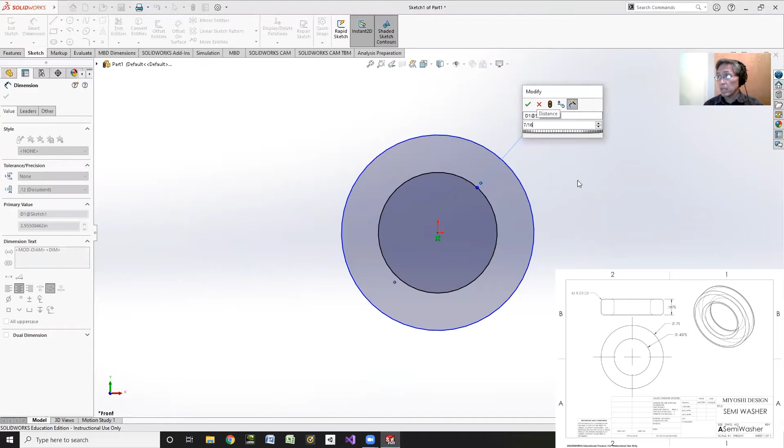Then we'll just smart dimension it. It's going to be the same as our axle, actually slightly bigger than the axle. So it's 7/16, and then we'll make the outer one 3/4.

Now we're just going to make extrude boss base. It doesn't matter if we extrude both ways or not. We're going to extrude it 3/16 of an inch, so I'll make sure this is highlighted and do 3/16.

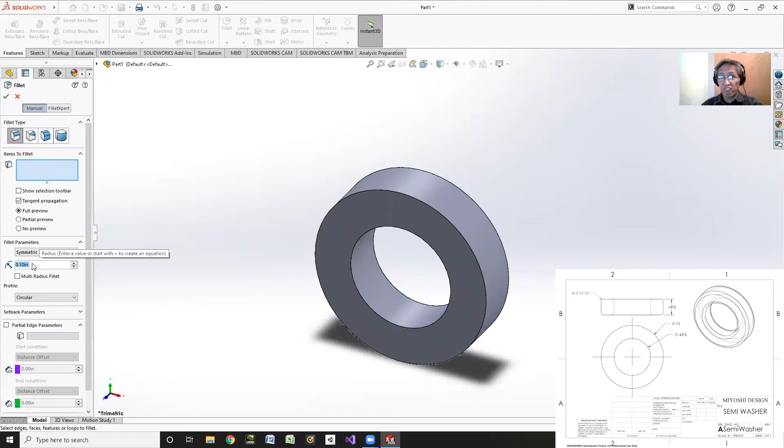There we have it. Now, since it's a little washer, maybe I should put tiny fillets there. So let's do fillets, small ones. We'll make them 32nd, grab the edge, and there we have it.

Little washer. Oh, let's do one more thing. I'll right click on fillet, go back to edit the feature, and we'll put little fillets on the inside too. There we go, little fillet.

So I'll save this up as little washer, I'll do semi washer. That looks really big, but it's not.

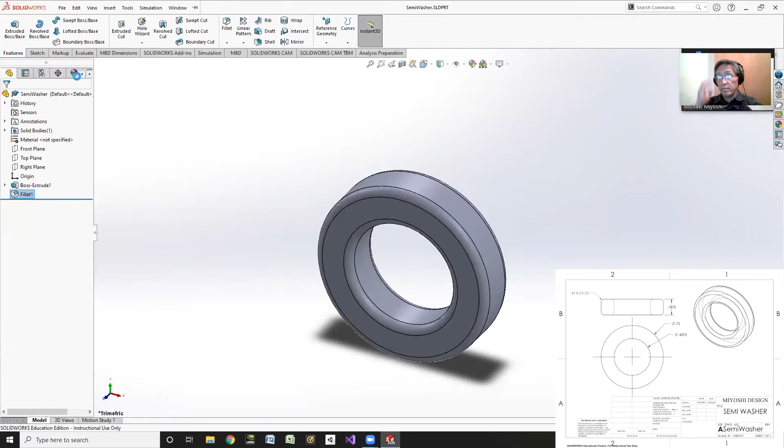So then we'll do a new part from drawing, from part, and select ANSI landscape.

Of course, I want to do drawing, model view next. And I want to do multiple views: top, front, and right. The trimetric's already selected, so I'll leave that there.

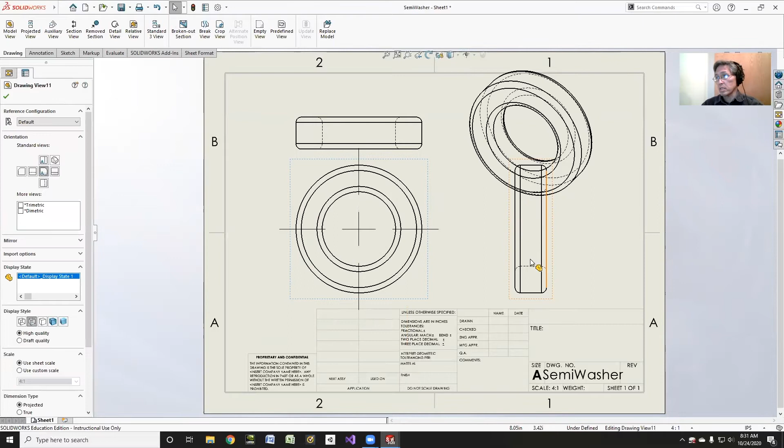I want to see the hidden lines, and notice I want to use sheet scale. It is 4:1, so it's quite a bit big. We might change that in a minute. We'll move this around a touch. If I don't need the right view, we'll see which views I want.

I do want to get rid of the tangent lines. Right click, select tangent edge, tangent remove. I got to do that on all my views, so right click, tangent edge, tangent remove, again on the other view. And I'm going to do that on the trimetric view too, right click, tangent edge removed.

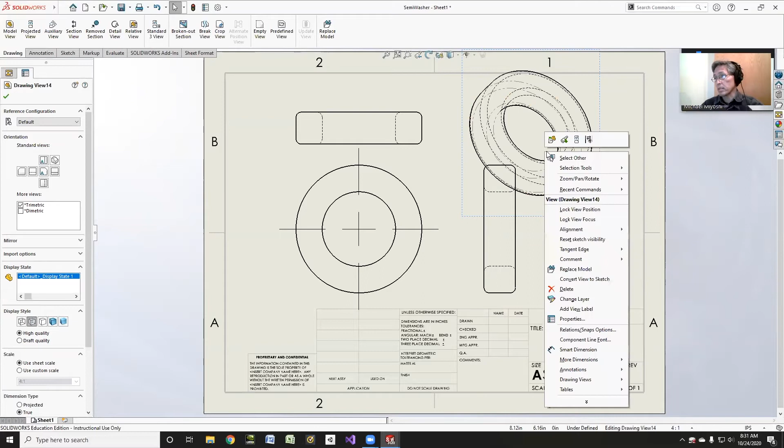No, maybe not, we'll put it back in. Right click, tangent edge visible. I don't know what this font is, let's try that, see what that is. Yeah, I don't like that as much. So we'll right click, tangent edge visible. Yeah, it's okay. All right, so move that down over there.

Now we will do annotation, model items, entire model, import items in all views, and hit the OK button. Move that down here.

Make sure it's enough decimal places. There we go, and move the diameter here. Looks good, pull this out just a touch. And my fillet dimension, I don't really like it there, so let's just get rid of that.

We'll just put another smart dimension, fillet it up here, or put the fillet up here. And we know that's going to need 4 decimal places. That's 5, I need 5.

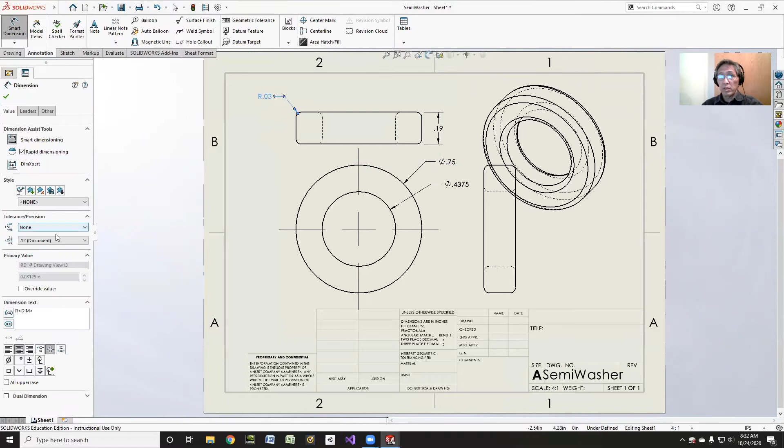So for the 32nd, I need 5 decimal places, and we'll put 4x there, 4x space. Okay, and I'll put it like that. Looks better. Then we'll make sure we give that enough decimal places as well.

Oops, I don't need 5. We'll just do 4, and that looks pretty good.

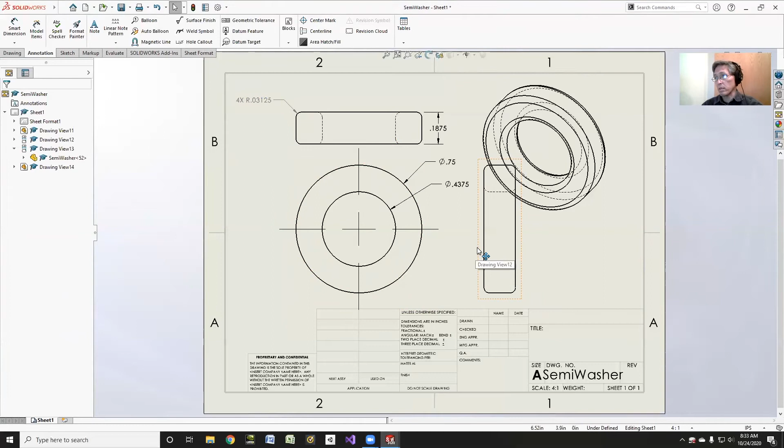I don't need this right view at all, so I'll delete it. Yep, sorry, oops, need to do that, get that back, I don't want to get rid of that. I want to be out of smart dimension, that was my mistake, I'll get rid of the view instead. Just hit the delete button, hit OK. And there we have it, our little washer.

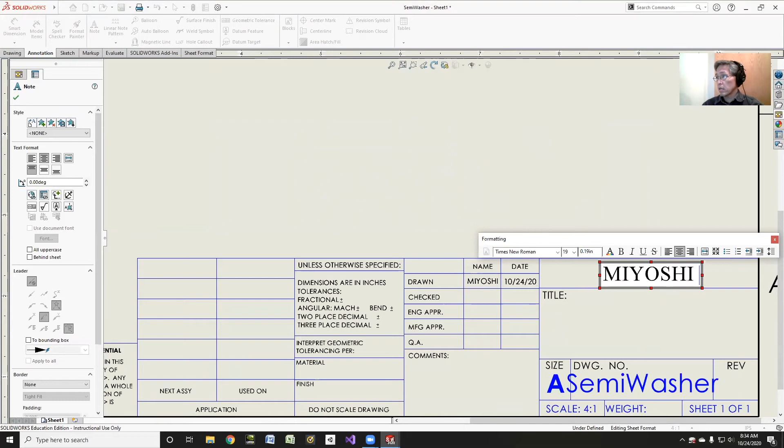So I will right click on sheet format, edit sheet format, and double click on name. When the A shows up, all caps, put my name, the date, today's October 24th. I need to double click in there. I'll click in here for my design firm. They should put Design with Miyoshi, shouldn't I? Double click in here, and I'll do that. There we go, our own little washer.

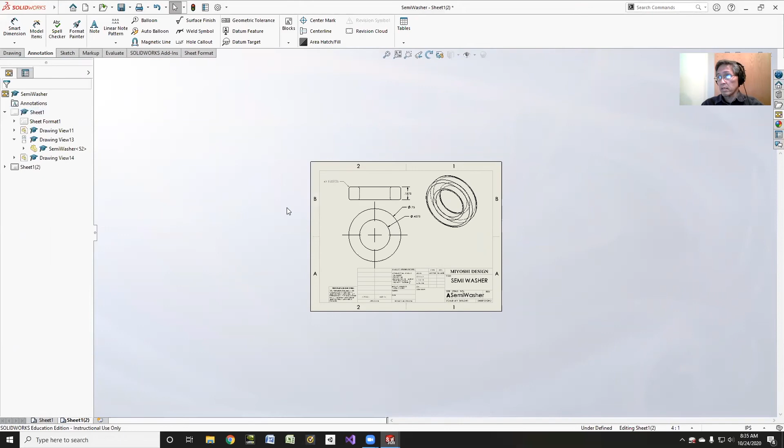On the OK button over here, right click sheet format, edit sheet, zoom out of it. Of course, I don't need to do that. Right click, or middle mouse button, it's a wheel but I use it as a middle mouse button, and the control key, and I can pan. Oops, wrong thing, come on, escape. Oh, come on. All right, control key, wheel, there we go.

And I'll do save, hit OK, or save all. And that's good for the name. Then of course, I'll do a save as, save it as a PDF file.

Hit OK, or save. Oh, what happened to the sheet? Oh, I see what I did, I just need to get rid of that sheet. Right click, delete that sheet. Yep, I don't need that sheet. So now let's do save again.

And I'll do a save as and save the PDF. There we go, didn't realize it saved. That's okay, there we have it.

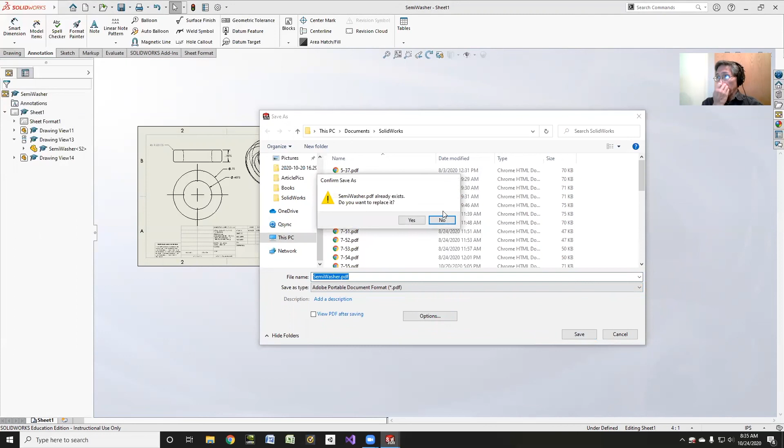A nice little washer that'll go on the axle, so the axle doesn't go back and forth too much or in and out too much. Okay, there we have it, the washer. Thanks for tuning in, we'll see you next time on Design with Miyoshi.